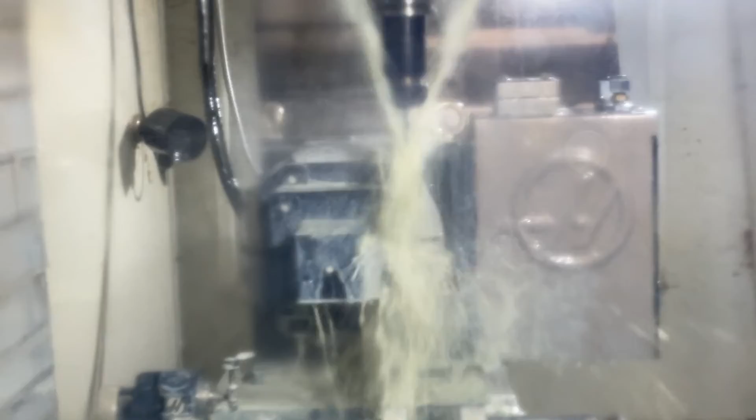Welcome back. Who's ready to make a little more progress on this project? I know I am. I'm getting excited, and let me show you one of the reasons why.

A few of the sample motors showed up in the shipping department today, so that is cool. One step closer to being reality, really.

Okay, so these are the motors. I don't know if it's focusing on this or my face, but they're tiny. They're tested, they're proven. Other builders are using them, so we know it's dependable, and we may get some customizations done to these, I'm not sure yet. But you kind of really need to be doing a decent volume, or spending a ton of money, to really request those things and be taken seriously. So yes, got a few of these.

So now we need to build a couple of these machines, get them running, put them through their paces, get them out into the field with some sponsored artists, and get some real feedback on what they think. And at that point we can push forward with making a few more.

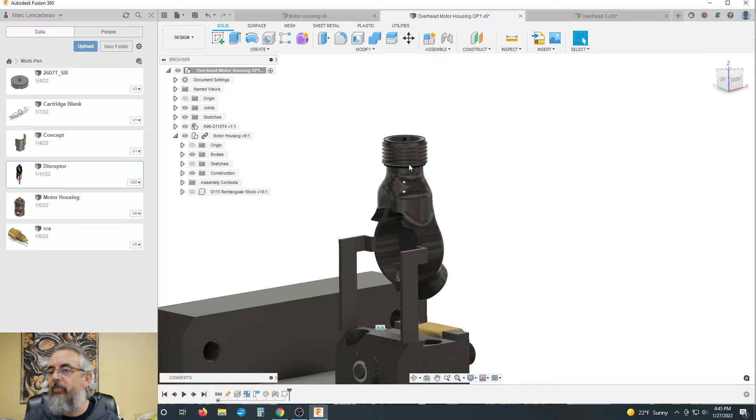We did not have a thread mill, and I decided that's okay because I decided to change the pitch of the thread a little bit anyways, and I did order the thread mills, so I will have the end mills coming, but I have the specs on them. I have built imaginary tools and put them in my tool bin, or tool crib, here so that I can simulate what it is that they do.

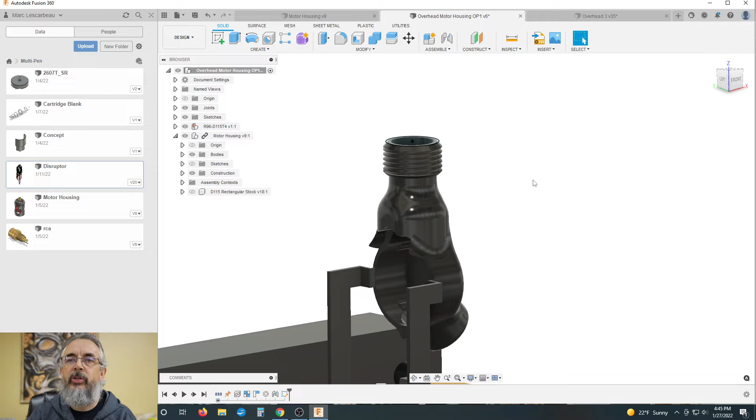So anyways, let's see where we're at. In manufacturing, okay, and let's do the... alrighty, so let's add the thread. Tools, I want to say we're gonna go to...

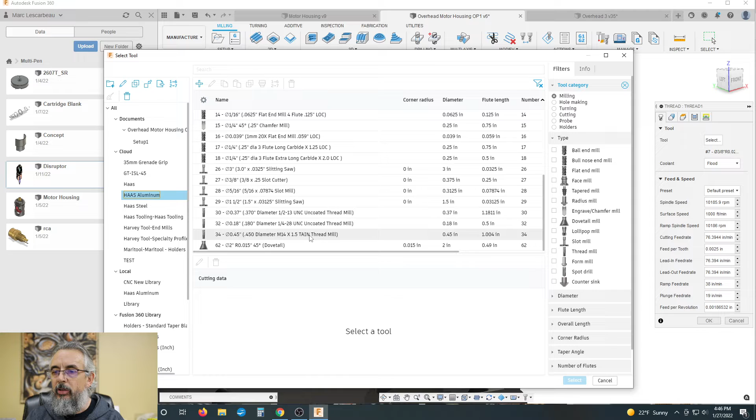Just put it in, it's tool number 34. And geometry, selection mode, nothing selected. I did create this little sketch right here. And then let's do tool orientation.

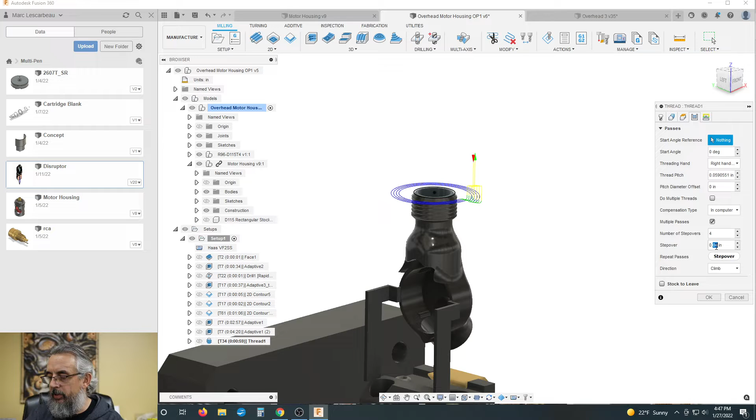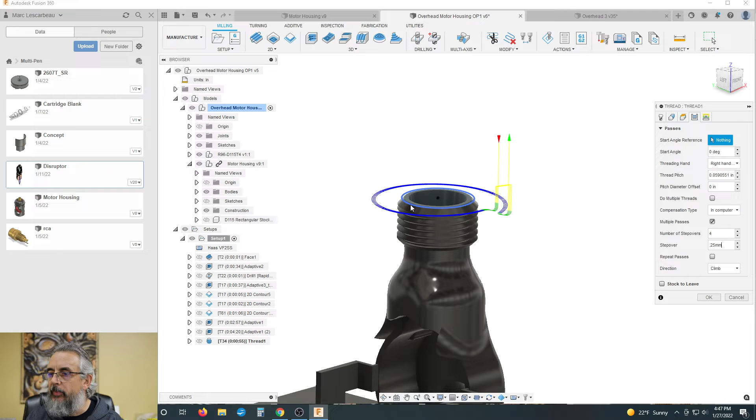Okay, there's a Z. Grab an X. Okay, and over two passes. Let's do multiple passes, and we will do 4 step overs and a 0.25 millimeter step over, and believe it or not, that is it.

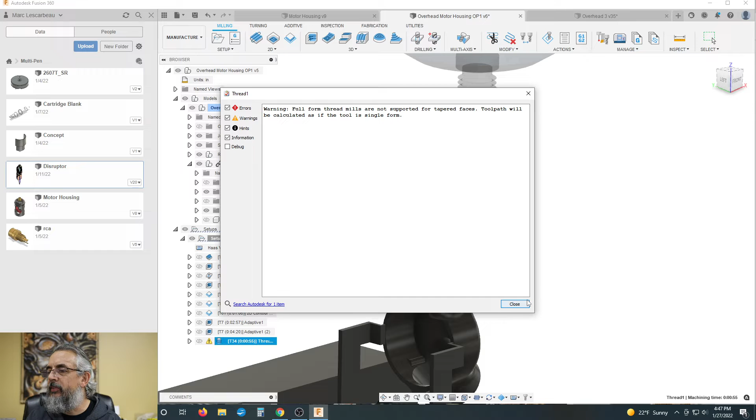So let's... oh, warning. Let's see: full form thread mills are not supported for tapered faces. Toolpath will be calculated as if the tool is single form. I have no idea what that means. I'm going to have to ask somebody smarter than me, maybe on the forums.

But let's drag that up to there, because that was the contour for that. So we'll add the threading right after it. Oh, that's what we didn't do - we did not set our heights, and we don't have a hole bottom. We'll do selection. Ooh, yeah, look at that, good stuff.

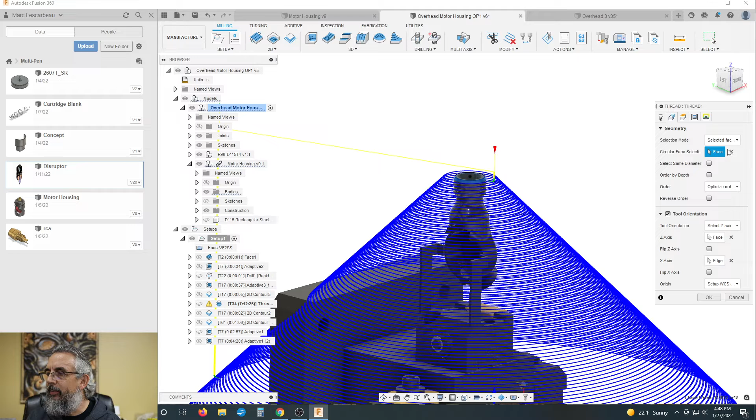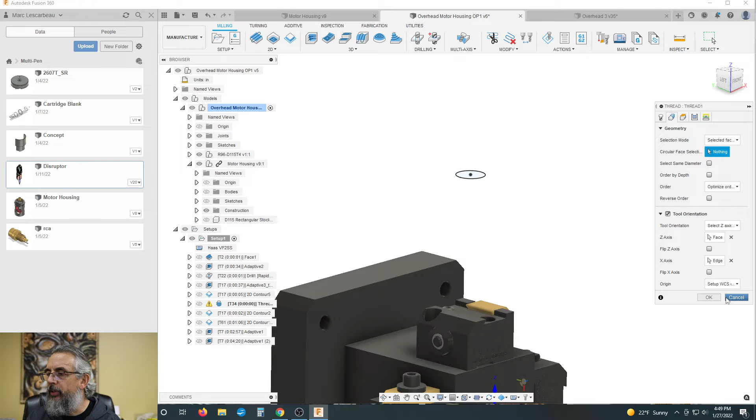Why is it trying to cut on a taper? I must have selected a wrong face. But let's get out of there. I did select a face. I wanted to select... I want to select that line. Why is it not allowing me to select that contour? Because that's a contour I created here and not in the model. Of course, cancel. All right, let's go back into our motor housing.

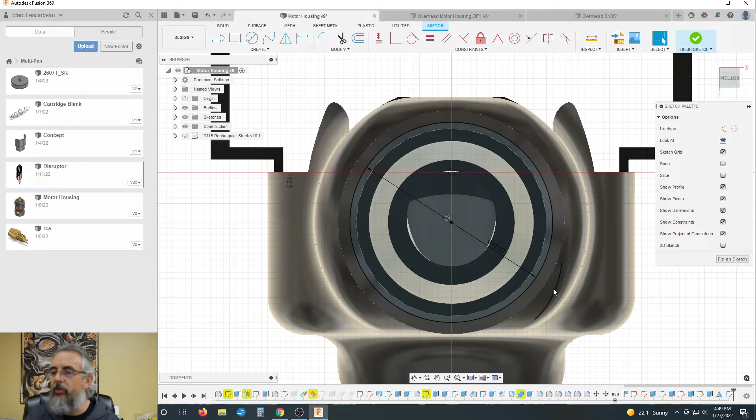And let's create a new sketch over here. We'll create it on this face. We'll do a circle from the center, go out to 16 millimeters, and finish sketch. Done. And Control save - now that's going to kind of force these changes over into here when I update.

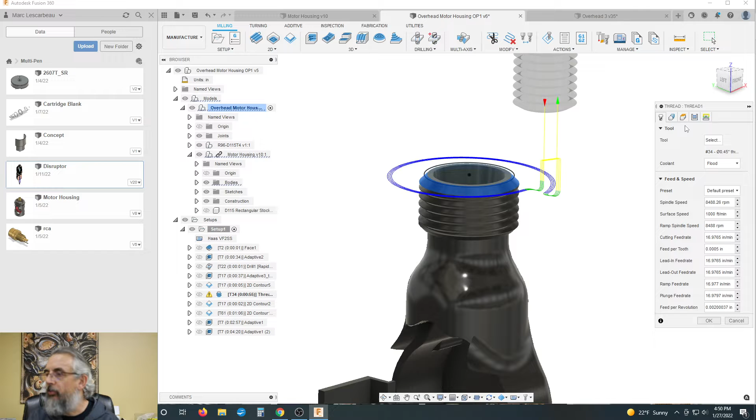So update, close, and let me go into this design just for giggles, because this sketch I don't need anymore since it's in the wrong place. Okay, so now we'll open this, and we will be able to turn the sketches on here. Now I should be able...

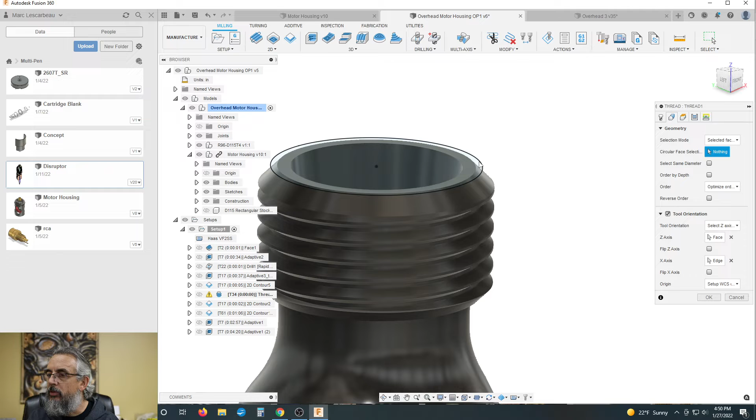Why? It's not a face - I do not want a face, I want a contour. Why? Select face. Oh, diameter range, duh. Let's just work with that: minimum diameter, maximum diameter. We have 16 millimeters, 18 millimeters. This may be a new feature - I've only done thread milling in here a few times in the past, and I don't remember those options.

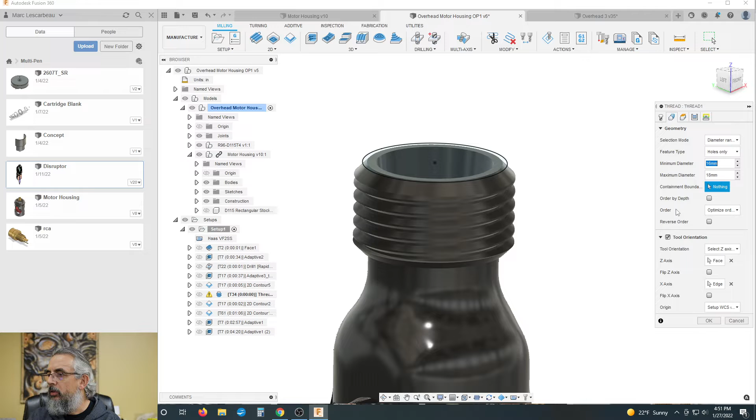So let's see, let's go to selection, and we really want to go on the bottom of our tool, probably about that deep. Let's go 0.5 millimeters higher and see if that did what I thought I was going to do. Okay. Come on, generate the code. It's going - I can see it blinking from time to time.

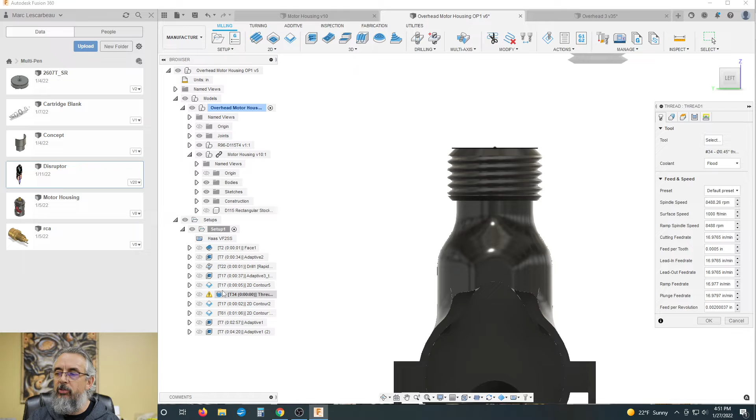You know what, it's trying to do internal threads, I think. Boss - there we go.

Come on. Nothing to mill. The joys of software. Okay, so what are you missing, Marc?

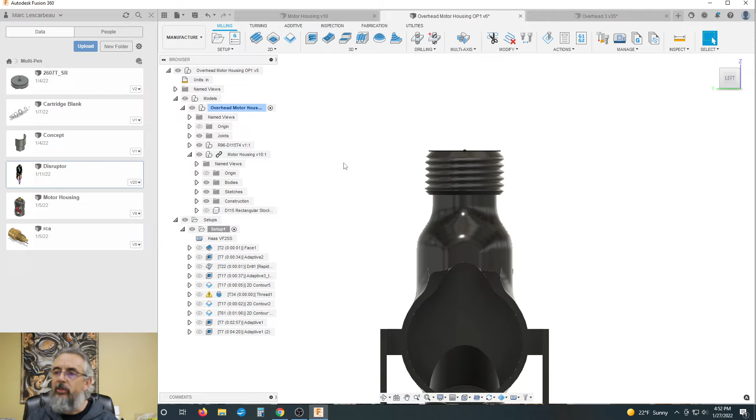Diameter range, I don't want to select a face. Oh, actually, you know what I can do? Here, I forgot about this. Design. Go there.

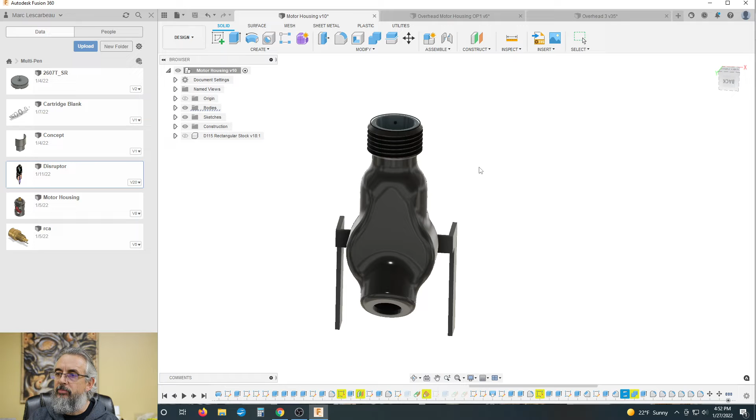Alright, here's the motor housing. Let's grab those threads. All we need to do is suppress that. And Control Save.

Update. It's been a while since I've done this stuff, so. All right, there we go. Now we just have this. In fact, one more thing I do want to do that I've forgotten about was,

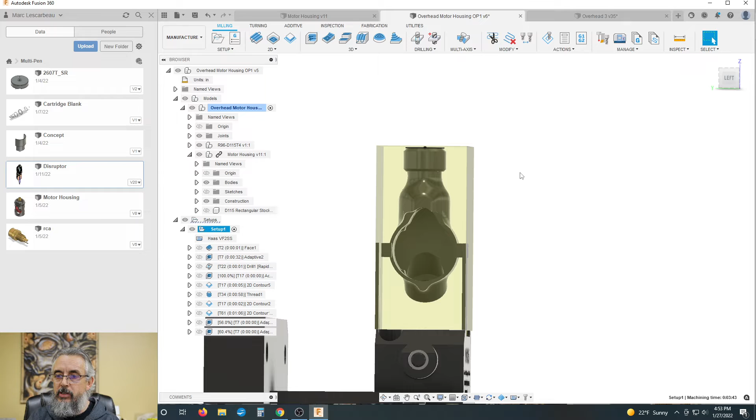Let's see, setups, generate. Before we thread this, I want to put the chamfer on there too. Can't remember if I have a back chamfer tool, but if I have one, I will cut this back chamfer on there too. If not, I'll turn around and order a back chamfer tool because we want it finished and looking nice.

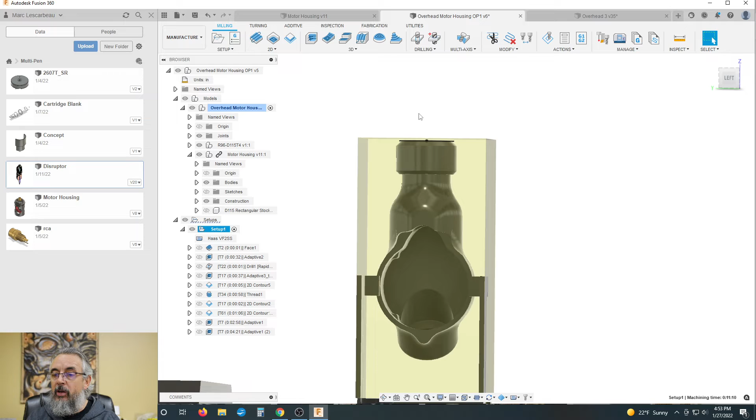So, okay, so that's all regenerated. Let's do 2D chamfer and select tools. I'll put this on my other monitor. Okay, so aluminum,

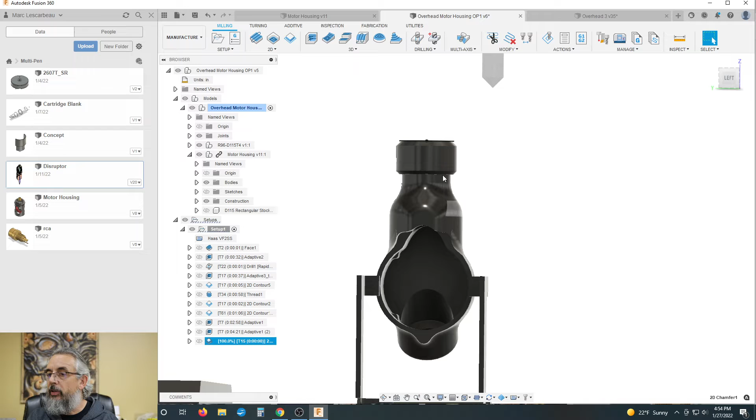1/4-inch chamfer mill. Select contours there, and that should do that. Nope. Didn't do my tool offset or orientation.

There's my Z. There's my X. Let's try that. Nope. What are you doing wrong, Marc?

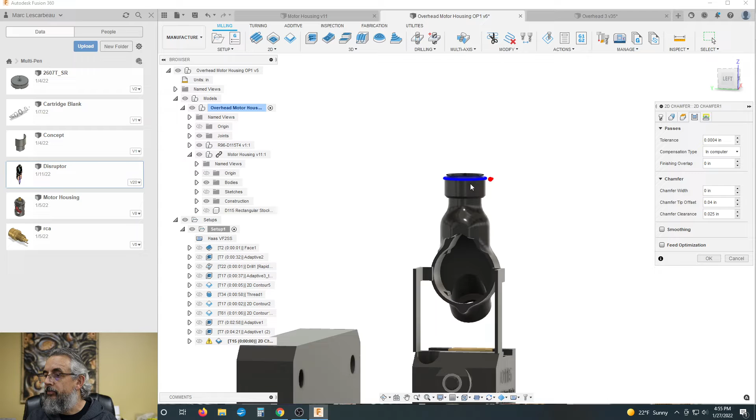That is what I'm looking for. Chamfer width, 0.5 millimeters. Working in inches here, I probably should change that.

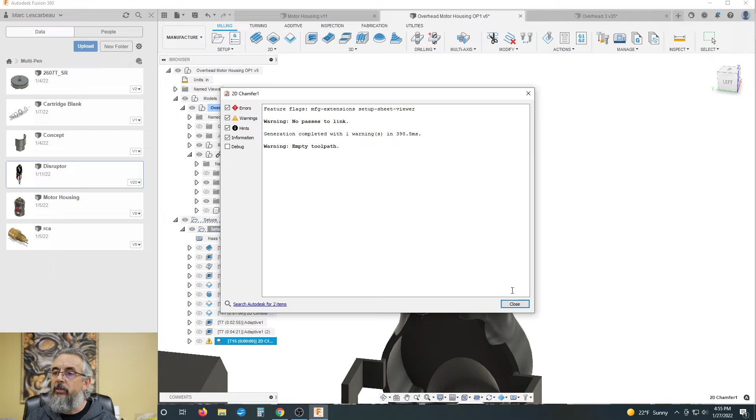Okay. Now this is a simple task. I never have a problem with this, so I do not even know what is going on. No tangent extension, no separation extension. That's correct. That's correct. That's correct.

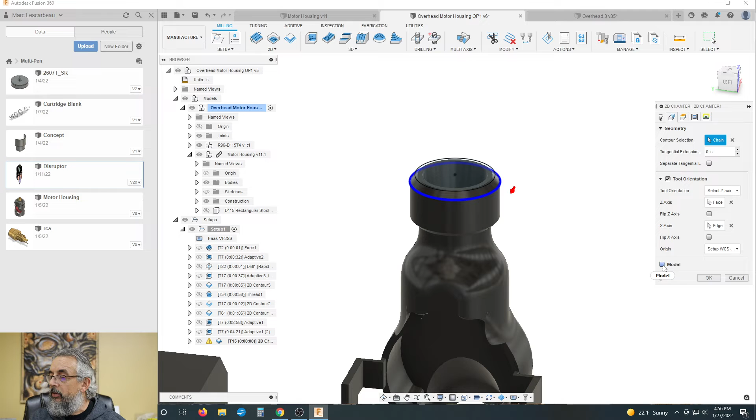Why is it not showing me about? It's kind of troubling. And passes. Overlap, I always like that. 0.25, blah, blah, blah.

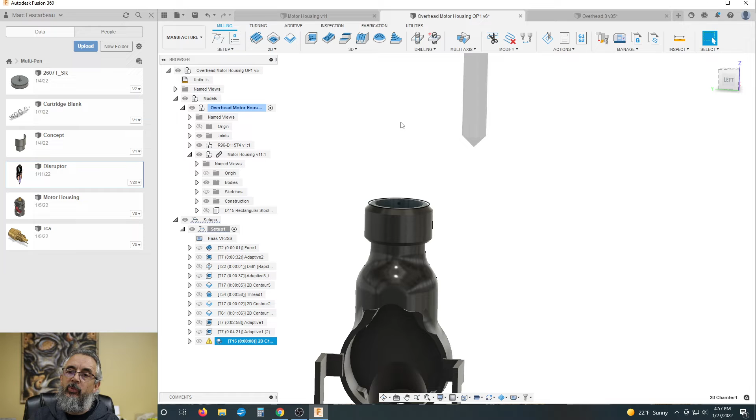I know what it is. And again, it's one of those strange little idiosyncrasies that when I create these things, I model them up to the best of their ability. And then when you go to manufacture them, the CAM software would prefer to have the bulk blocky shapes. Like I just removed the threads out of the image to get that. Not a problem, that's cool.

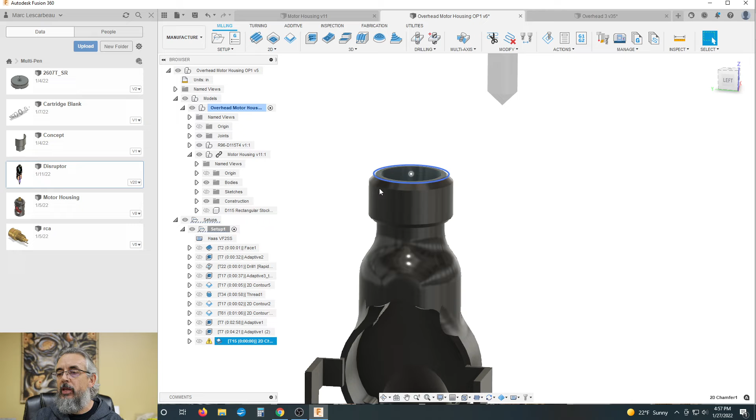But same thing with the chamfer. For some reason, it doesn't like to see the modeled chamfers. So that's not the end of the world. We go into here, we select that face, we go find it, and we suppress it.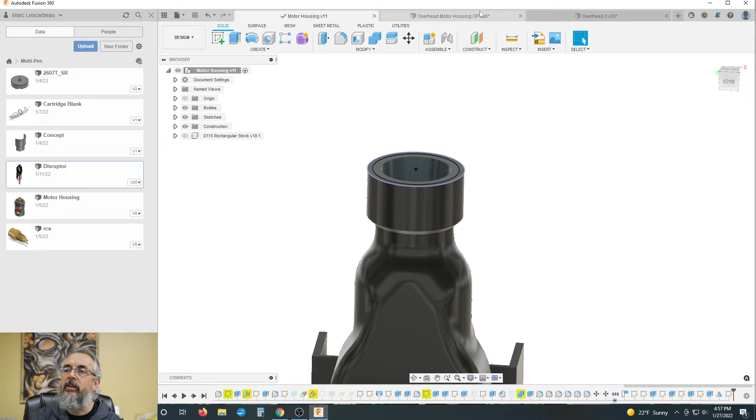And as the computer catches up to us, you'll see a square corner up there, not a chamfered corner. Control save, get out of there. Now we go back over, we update, update all.

Man, there's a lot to remember here. So, okay, here's our chamfer. Let's delete that stuff, that's all still good. We just pick that edge, and everything else should be good.

And I should miraculously get nothing. Yes, I am your brilliant leader. All right, what's going on, Bart?

That's what I want. All right, let's do it this way. Let's delete that out, and we're going to go and start from the beginning. And it's going to work just fine.

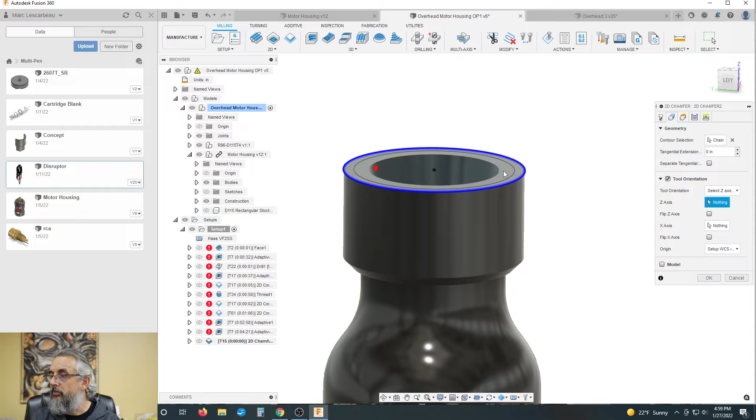Select the same exact tool. Move over here. Contours that. And tool orientation. Z face, X-axis is there. And height's kind of irrelevant.

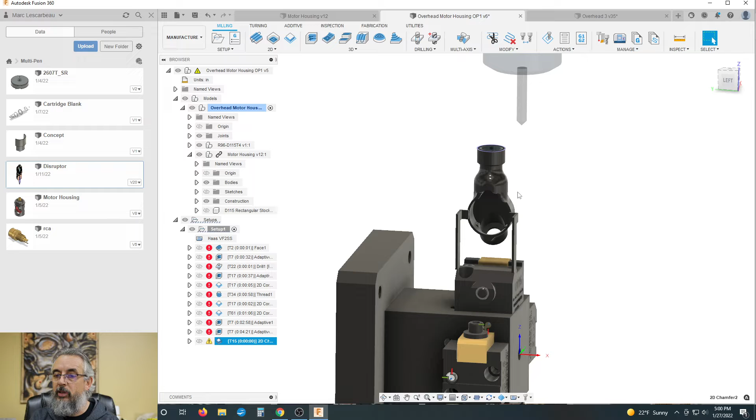Passes tab. Let's go to chamfer width of 0.02. Just click go, and I am done. So it's not going to give me an answer in the warning.

That is a little frustrating because chamfering is one of the easier operations out there. All right, so, makes me angry. All right,

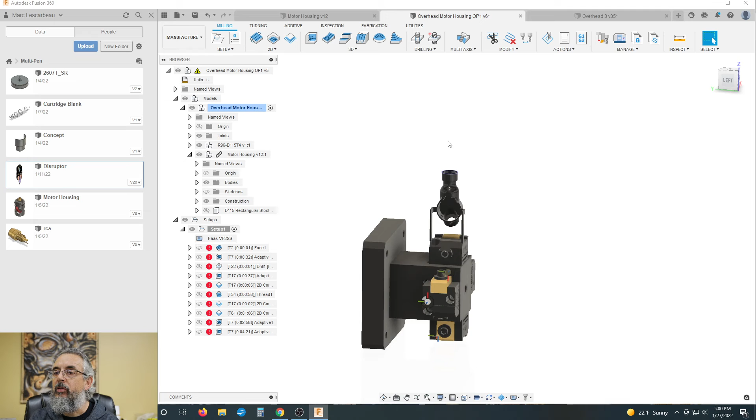Let me see. Let's do, I'm going to fake it. I'm going to contour with, I'll go back and fix it properly later, but for right now, I'm just going to

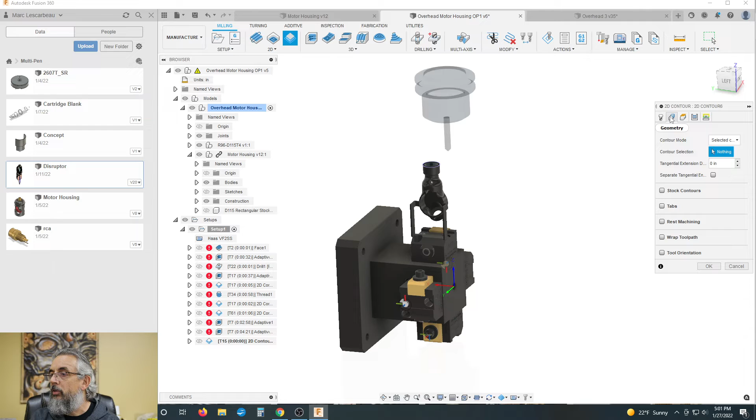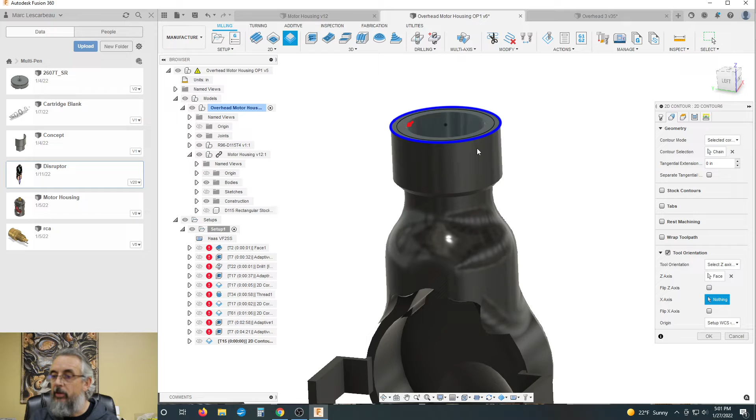Kind of cheat here with the, that's my path. I'm going to do my tool orientation because that constantly needs to be done. And x-axis again. And depth.

Selected contour minus 0.02. And we're going to go, oh, let's see. Ah,

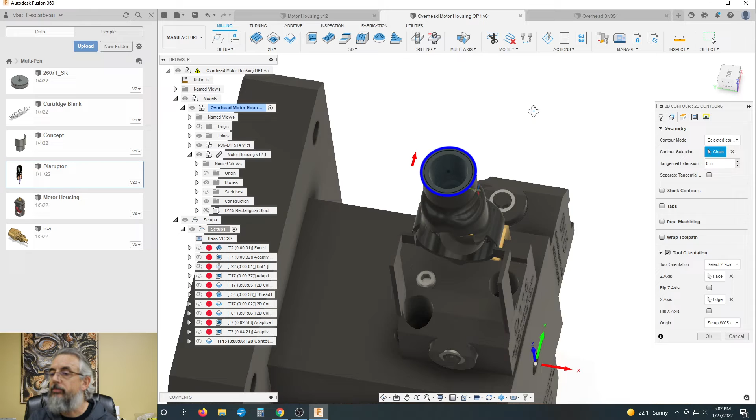My red arrow is on the outside of my circle. Was it that silly the whole time? Just for giggles? Okay.

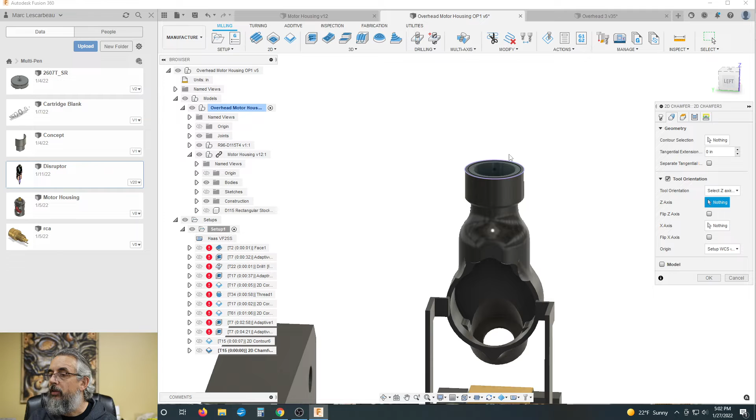Let's do it real quick just to see if that wasn't something that ridiculous. Tool orientation. There we go. X.

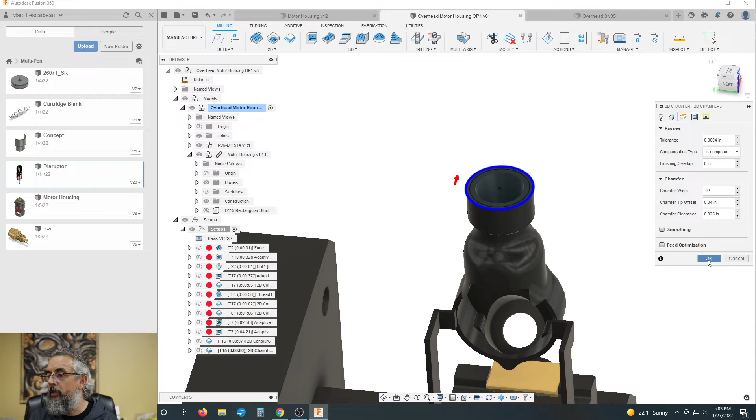Contour selection. Yep, let's put that on the outside. Heights are fine, tabs are fine. 0.02, and just go. Look at that. Once I find the workaround, I don't need it.

Okay, so regenerate everything here and put things in the proper order, and I will be able to show you what's going to happen here. Oh, because I changed the face.

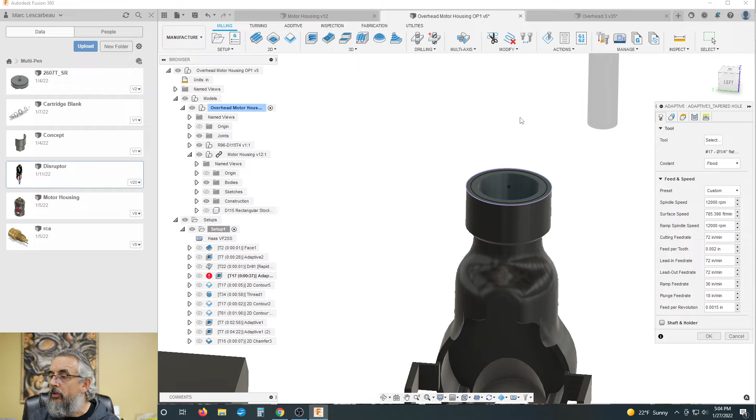I changed the model face, so okay, that one's good there now. And what's this one? What is missing there? Based on the tool orientation.

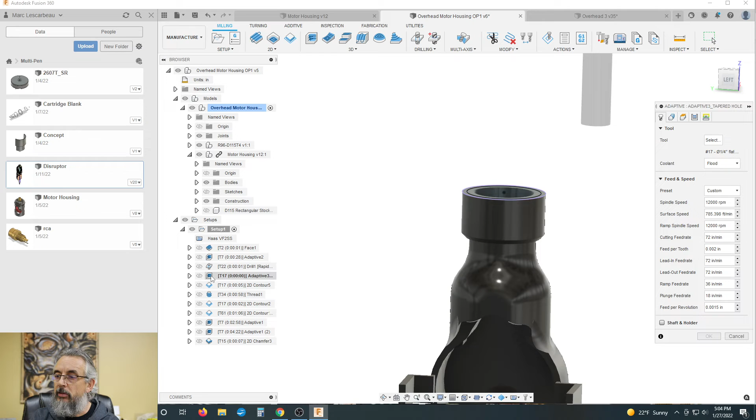See if that generates properly. All right. Whoa, whoa, whoa, forgot my containment on that. Things are getting crazy. All right, so selection, machining boundary, and there. Keep everything inside there. Okay.

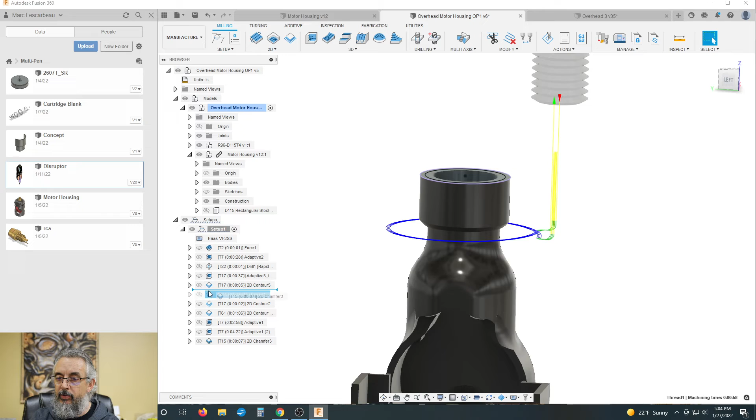All right, so that's that taper. That's that outside profile. That's the thread. But before the thread, we want to add the chamfer. Okay, let's save and simulate. All right.

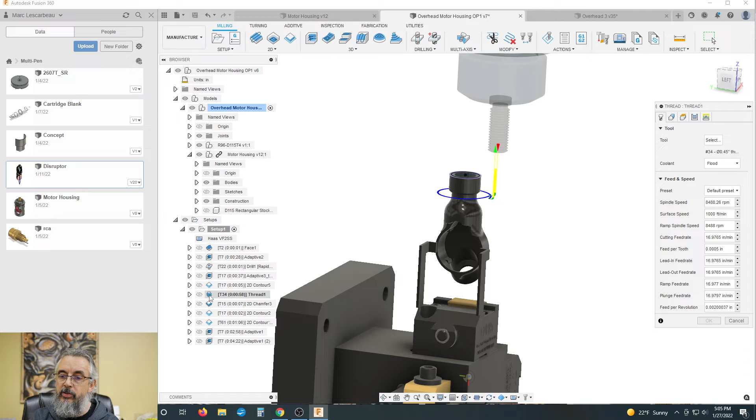Our thread's barely cut, but you kind of get the idea. That's easy enough to get rid of and close out of that. So what do I need to do on the thread?

I do love this about the software though. If you hover over something, it gives you a little short description. So, smallest diameter, the holes or bosses to include in the selection.

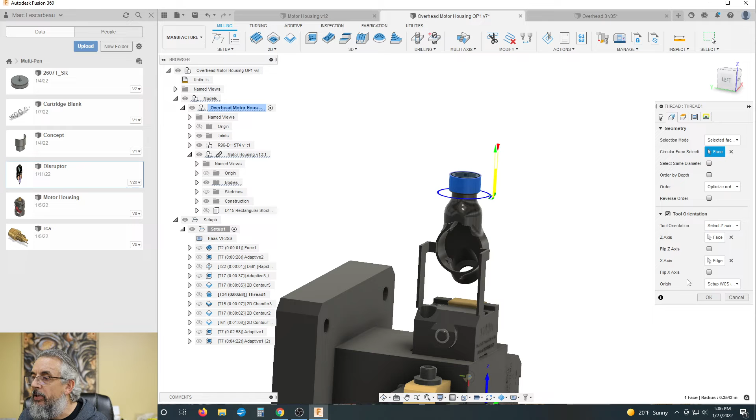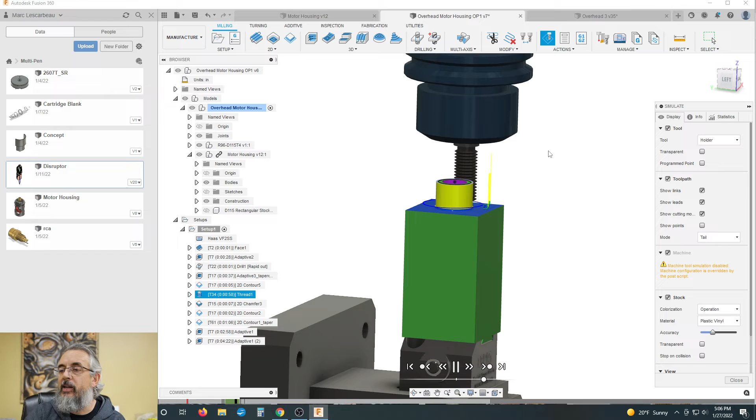That's all. Right. I might look like a blooming idiot sometimes, but not everybody can remember everything all the time, especially when this isn't what I do all day, every day. I don't make my living doing this. I design things, create things, engineer things because I feel like I have to. I enjoy it. So, all right, threads are still not cut deep. So let's see where we go with this. And select secondary. Let's see. That's correct. Start angle, reference, nope.

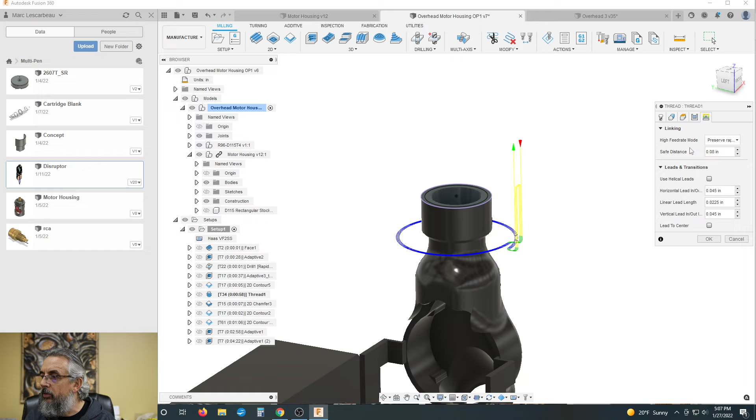Threads, computer, multiple passes, number of step overs. That be repeat passes, climb style. It's been a while.

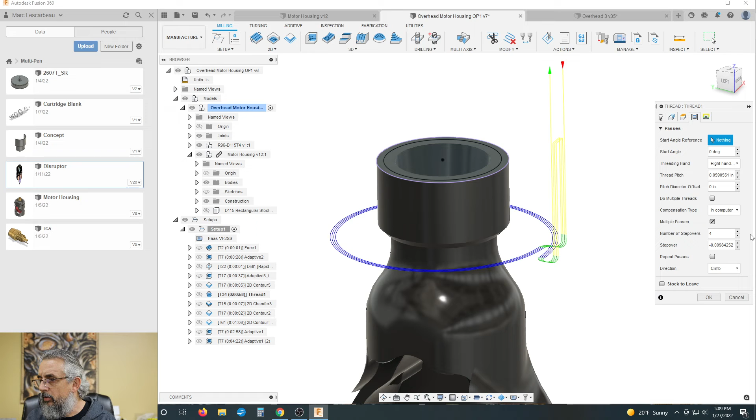It's got to be here. What am I missing? That'd be a negative? Step over must be positive. Okay. 0.25 millimeter.

Let's simulate that step only. Let's turn the stock off and speed down. See what's actually happening.

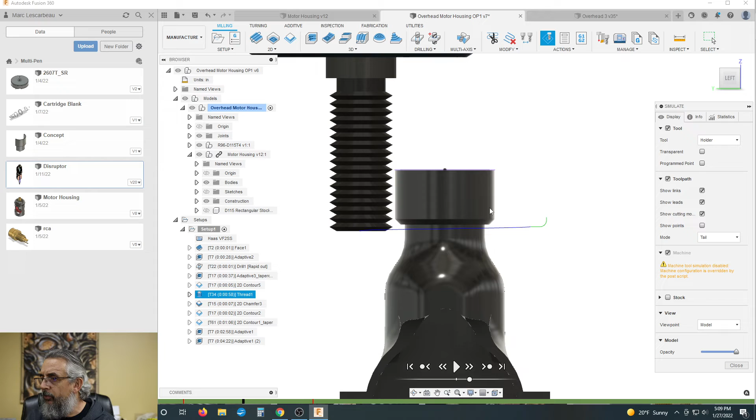Okay, so it's not even coming close to the model to start with, so that explains why it's just the last pass that's kind of scoring it. But why is it doing that? That's kind of lead in.

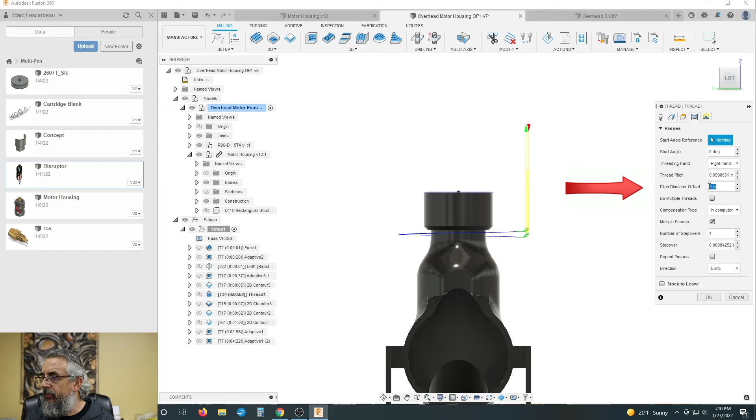Safe distance is 0.08. What am I missing? There's something crazy. Pitch diameter offset. What is that? Let's see. Give me a picture. Pitch diameter offset between the major and minor diameter is okay. So that's 2 millimeter.

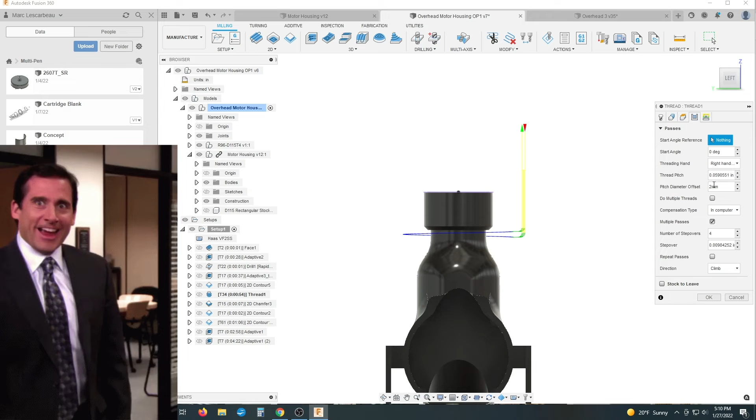I knew that. Okay, just missing stuff. That's all.

I promise you, I'm a little better at this than it looks. Working on two things here. I'm trying to be relatively informative and entertaining for you guys, and I'm trying to figure this out and do the work all at the same time. So it's definitely a little much at times, but you guys are troopers.

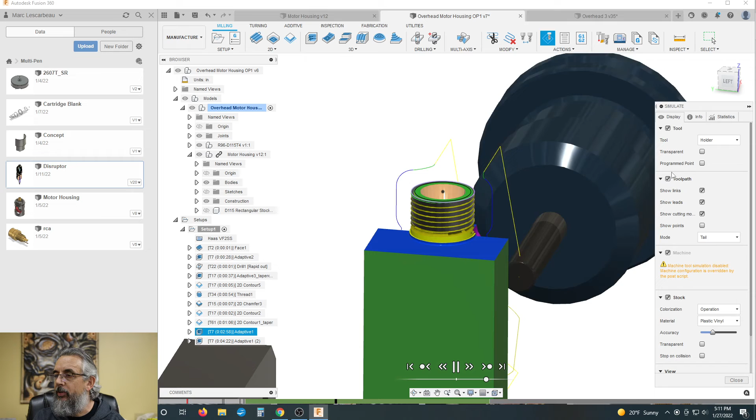There's our threads. Let's turn it... just gonna let it run all the way through its canned cycles right now here just to get a peek. All right, so

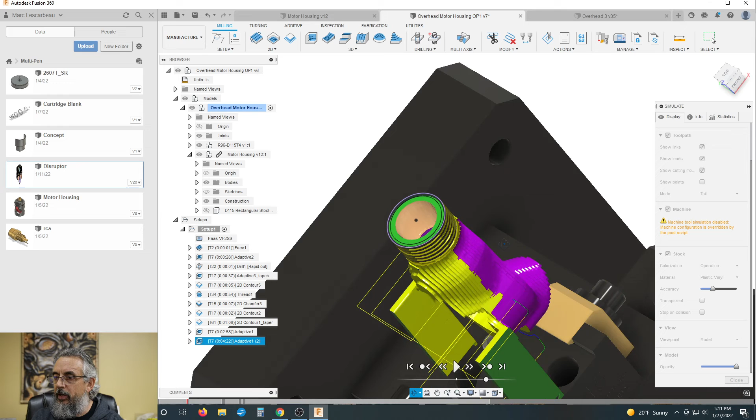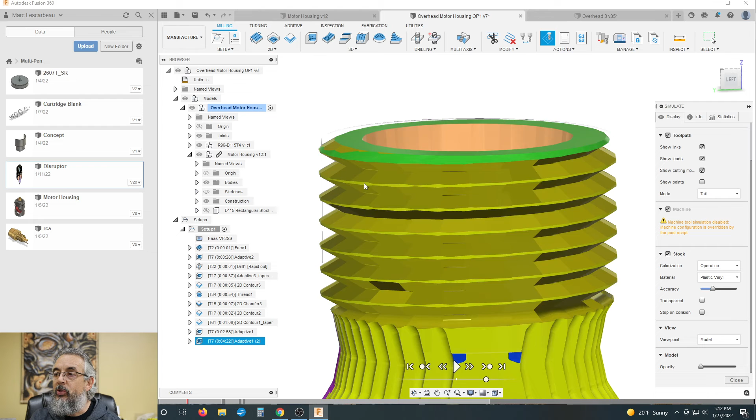you can still see the gray model sticking through there, so that just looks a little bizarre. But I turn the model opacity down. Now you can see that the threads would have been cut out of the stock, and you can see that's not a 60-degree thread taper there. That is a 45-degree chamfer that I had added to the part prior. I may want to steepen that up just a little bit, but

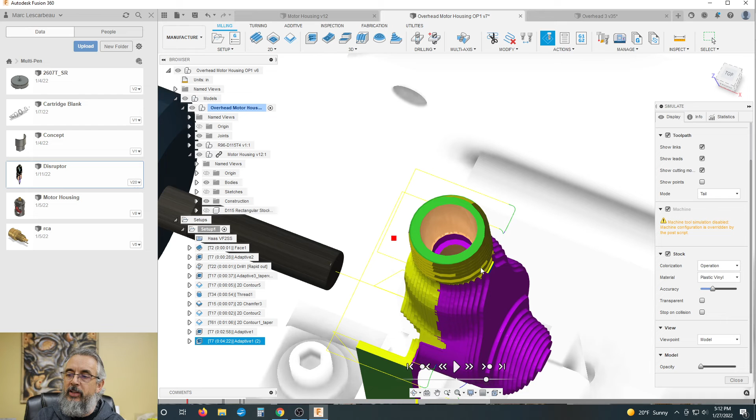you get the idea. We've drilled the hole. We have removed the majority of the material in the conical shape. We have put a chamfer, we faced it, put a chamfer around the top, removed most of the material around the outside, did a final cut on the outside, threaded the outside, chamfered the edge, final cut the taper for the collet. For the most part, that work from that angle on the bottom of the machine is done, other than some fine tuning.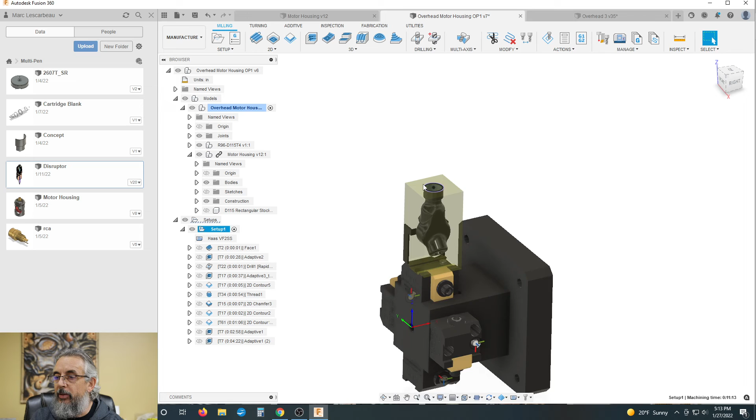So that's pretty cool. That sketch is going to bother me. So, must make this sketch go away. There we go. Seeing how it wasn't useful. All right, so that is all I'm going to do for right now.

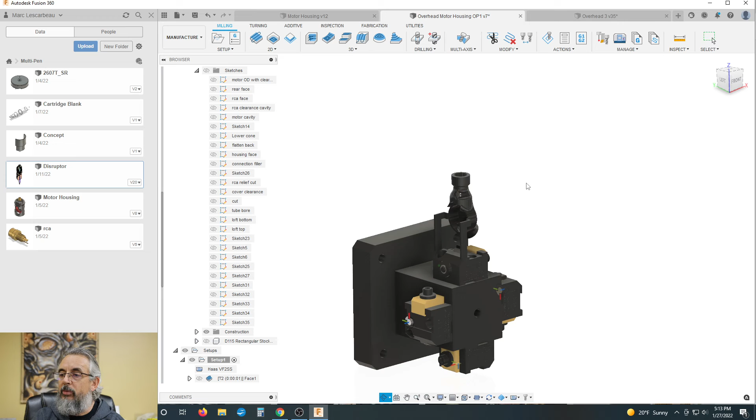It's getting actually late in the day. I got to finish up on some stuff around here and then get ready to go home. So yeah, I got a little bit more modeling done, a little bit more CAM done, and it wasn't an hour-long episode. So you get the idea, though. I'm going to think about how I want to approach this a little bit more.

I do a lot of the work not in front of the software. I have the ability to visualize things in 3D spaces in my head pretty well, mechanically speaking. So I will flip and rotate this thing around in my head on a regular basis, stare at it from different angles, and figure out what I think is the best way to approach it.

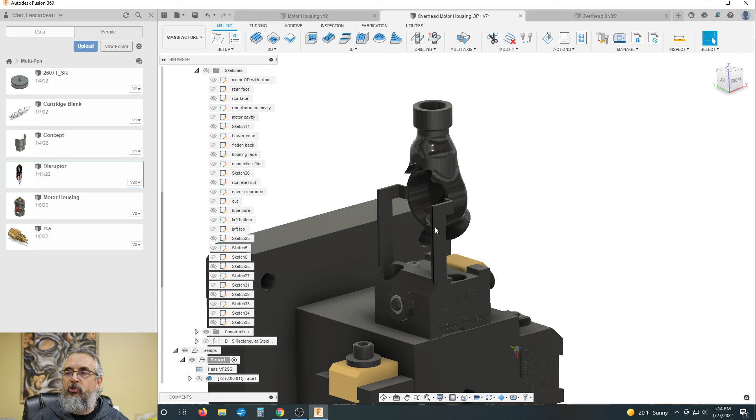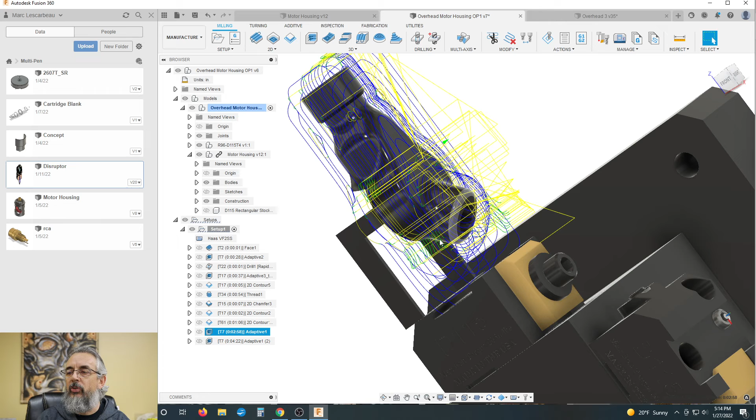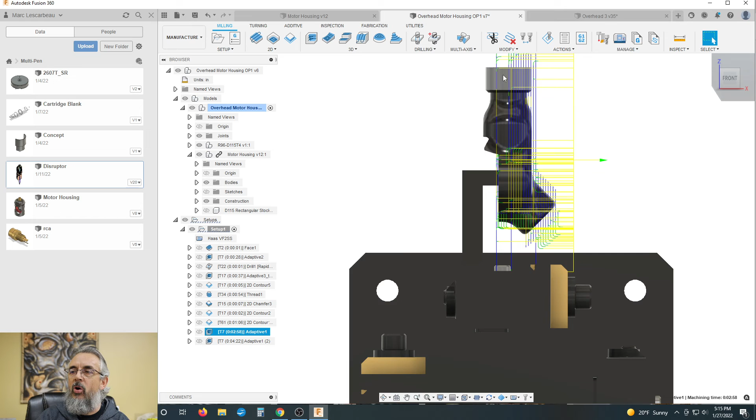And so instead of, let's say, give you the idea here of one of these really big elaborate tool paths where we're cutting away all of this at once, what I will probably do here is change my boundary so it can take away almost all the material, but nothing probably from this face back. So this will stay all still in a solid block, basically until I know all my work out here at the farthest end is done.

So I'll break this into two operations, doing everything from here forward, and then the same thing on the back side, everything from here forward. Once all that's done and everything up here is relatively finished, at that point I'll come in and I will start to remove the bulk of the material from this point back, probably still leaving a little bit of a third attachment point here.

If I leave one more attachment point between this protrusion down here in the bottom to the base, then I'll actually stay connected in 3 points, which is about the most stability you can get, even considering the fact that they're going to be tiny connections. And, excuse me, I will use those 3 points probably right up to the very end.

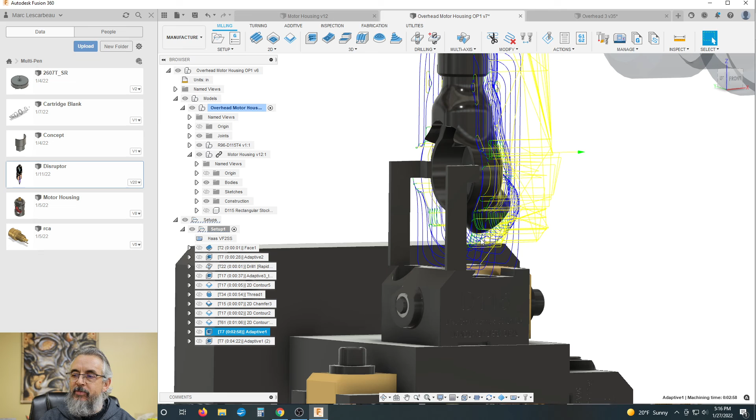And then I will come in and machine away that bottom fixture first, and then the last thing I will do is I will find a way to come in here and just alternately machine these tabs down thinner and thinner and thinner until it's really probably about the thickness of a sheet of paper, just a few thousandths of an inch.

Damn, dry air, cold. But then, nope, no COVID. I'm good. But all right, that's a bad joke. We had some dear friends go. We all have. But it's the first thing you think of when somebody starts coughing. And that's a sad reality.

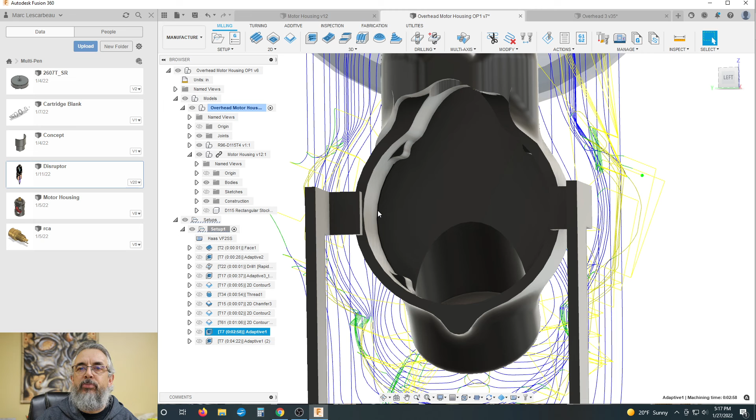But anyways, I'll machine these tabs down thinner and thinner until they're pretty much a sheet of paper, and they will hold like that because I won't be applying any machining pressure anywhere else other than those areas. And I can cut it down to the point where I can reach in there and tear it off without much more force than tearing a little more than a sheet of paper, maybe like a business card. I can just snap it off, and then all I have to do is machine off those tabs, and we have a finished piece.

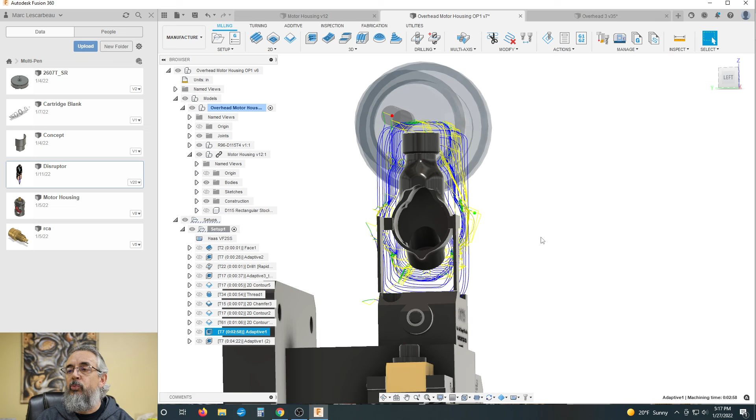And this is the most complex piece of the whole system. So what I'll probably end up doing, I haven't decided 100% yet, but I might run 4 bodies at a time, depending upon how close the tools get to the housing, or if they're going to interfere with another part. And or I may run 4 separate components at once, which just happen to work better together.

But yeah, we did a little bit more today. You watched me fumble around, look like an idiot as usual, but I kind of want you to understand the whole process. I mean, it's not super quick and easy. It probably is for people that do it all the time. People that do nothing but engineer and machine parts can do this all day, every day. I don't use this software on a daily basis, so I need to relearn some things on a regular basis, especially features that are either entirely new to the software, or I may not have used in quite a while,

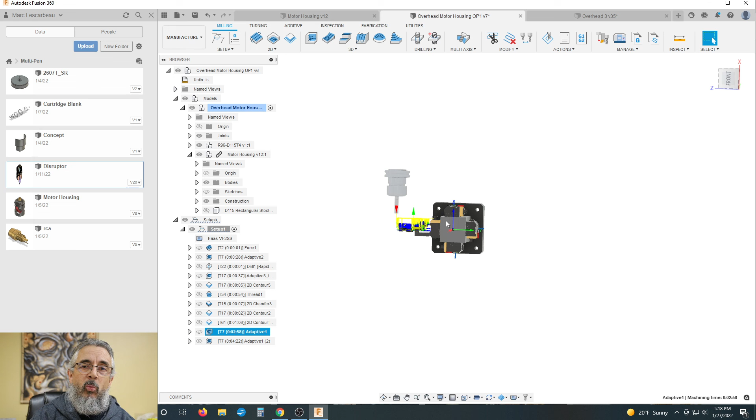or I can't remember the little idiosyncrasies for something until I beat myself up about it, try it the wrong way 10 times. Then I find a workaround, and approaching it from all these different angles, something snaps, something clicks, and I'm like, oh yeah, you giant dumbass, you've done this 100 times. You're just looking stupid on camera right now. But yeah, it's a struggle sometimes. But I hope you're enjoying it.